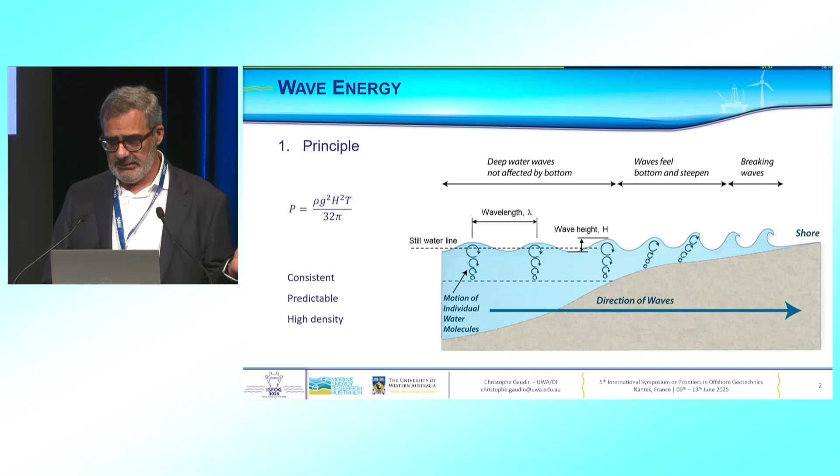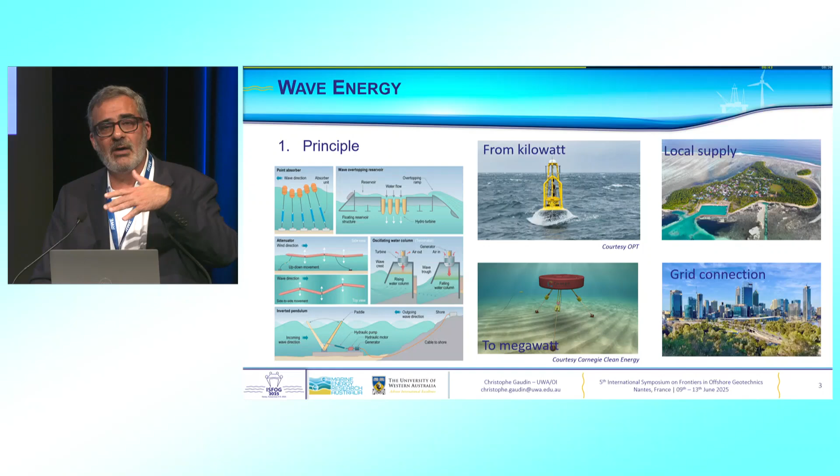And so the second advantage of wave energy, as opposed to wind energy, is that you won't see a convergence of the technology like you've seen for wind, converging towards the three-blade systems that we are all familiar with. There is a huge variety of wave energy systems that range from the kilowatt to the megawatt, and can cater to various markets, all the way from grid connection to power homes, to regional communities and islands displacing diesel, and also ocean sensors, and so on. And that's another advantage of wave energy that we will be exploring.

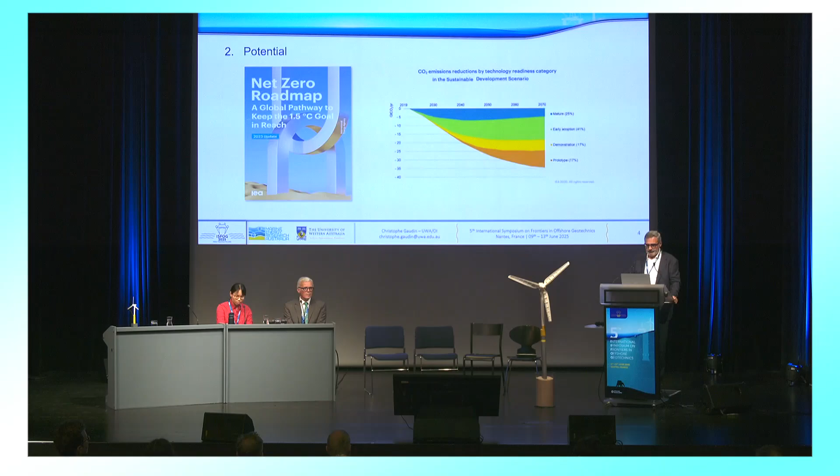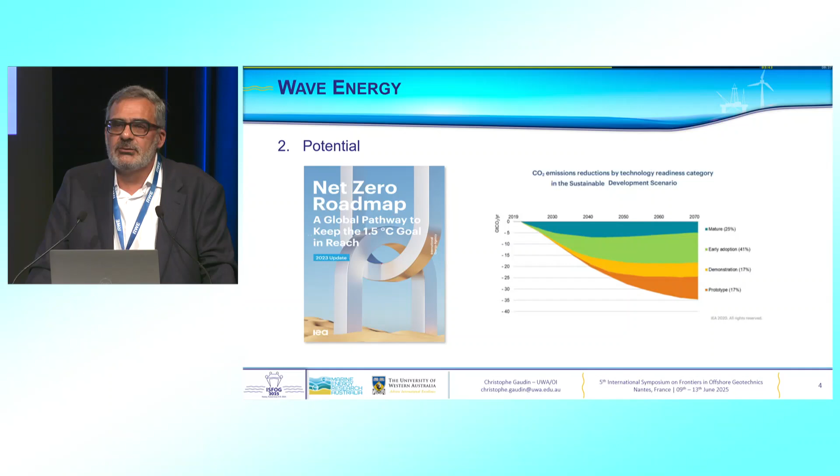As Luc mentioned, I'm part of the International Energy Agency. If you are not familiar with the body, the International Energy Agency does a lot of prospective analysis. One of their key reports is the net zero roadmap to achieve net zero by 2050. And an important message out of that report is that 75% of the technology needed to reach net zero by 2050 doesn't exist yet. What does it mean? It means that we are not going to achieve it with wind and solar and nuclear power alone. We'll have to develop new forms of technology, and wave has a role to play in the future energy mix.

Within that body, there is a lot of work being done, and so one of the subsequent prospective analyses that has been undertaken by Professor Henry Jeffrey from the University of Edinburgh is to try to understand the market demands and the economic benefits of wave energy being developed. And so you've got some numbers here. We talk here about all ocean energy, so it's wave and tidal.

And so by 2050, it is predicted that we will have about 300 gigawatts of installed capacity, creating 680,000 jobs, adding $340 billion in gross value to the world economy, and capturing 500 million tons of CO2 every year. So 500 million is 0.5 gigaton out of the 37.2 that we are emitting every year. So that doesn't seem a lot, but still, it's 50 times more than CCS will ever capture, and for an investment which is at least one order of magnitude.

Did you spot the provocative statement here? I hope that's going to fuel some interesting conversation at the tea break here.

So where are we in terms of technology? So technology has been evolving, following somehow a quite challenging pathway. Developers have been working very much in silo, protecting technology with IP and so on, then going under administration, all the lessons learned were lost, and so on. And so unfortunately, the technology has not evolved as rapidly as what we've seen in wind and in tidal, but has reached now levels that are close to commercial development.

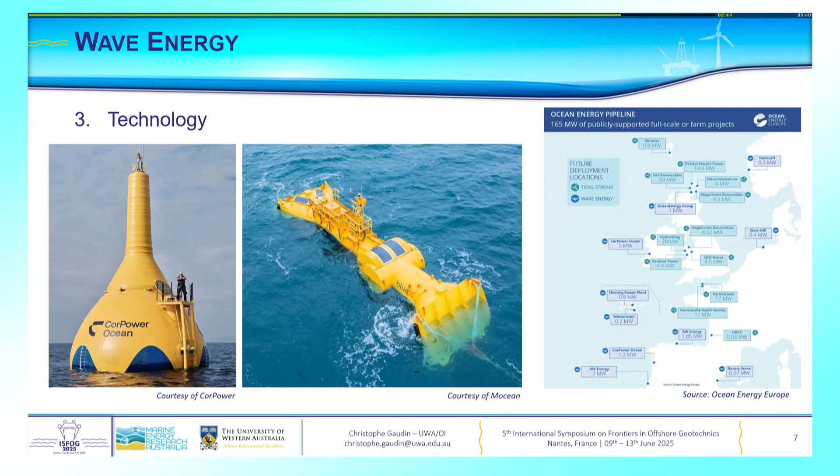Nevertheless, there is actually a pathway for development and deployment over the next decade, with about 160 megawatts of ocean energy being deployed in Europe over the next decade, and about 25 of them is going to be wave energy, with, again, CorPower developing the first farm of wave energy converters in Ireland for a 5 megawatt capacity.

So let's bring that to the Australian context now. In collaboration with the Blue Economy CRC, Cooperative Research Centre, which is a 10-year industry research collaboration in Australia that has a strong focus on aquaculture and ocean energy, the team at the Oceans Institute at UWA has developed an Ocean Wave Energy in Australia report that presents the potential of wave energy in Australia, the technological pathway, and the hurdles that need to be overcome to achieve its full potential, and provides recommendations for state and federal governments.

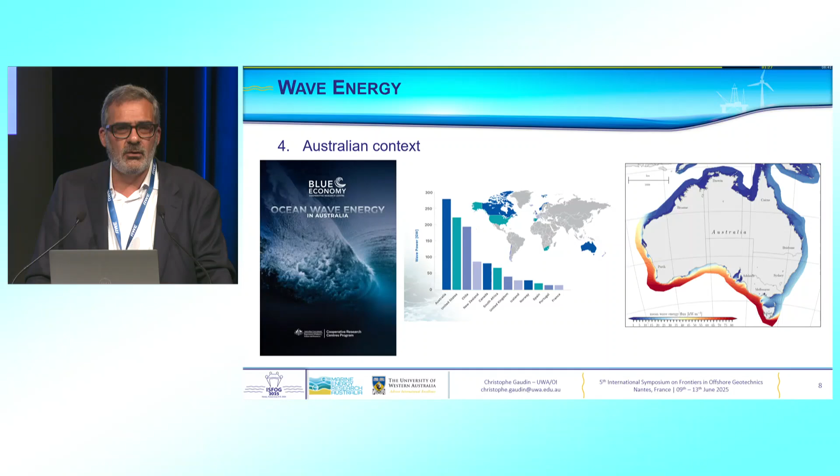In Australia, we're extremely blessed because we've got the best wave energy resources in the world by a long shot. You can see here that the potential capacity is over 270 gigawatts. It far exceeds what is needed to cover the domestic consumption. And a second advantage is that most of these resources are located on the southern coast, where we've got the highest density of population. In Albany, that we'll talk about a bit later, we have the best wave energy resources in the world, about 50 kilowatts per meter of wave all year long, very consistent with very small variability.

But that's not the whole story. The potential of wave energy is not only the resources, the energy density, and so on. Most importantly, it is the complementarity to the other renewable energy resources. And so our team has been doing a bit of work, started locally, looking at Australian cities along the coast of WA and expanding to the whole Australian context, to understand the impact of bringing wave energy into the energy mix in complement to solar and wind.

Once you start adding wave energy into the mix, the complementarity of the energy profile between the 3 resources actually leads to meeting the demand on a monthly, a daily, and a seasonal basis, and in most cases without any need for permanent storage.

To achieve that, you need obviously to vary the proportion and the distribution of how much wind, how much solar, and how much wave we've got. But I think it's a very compelling case about where wave energy can actually complement our renewable energy profile.

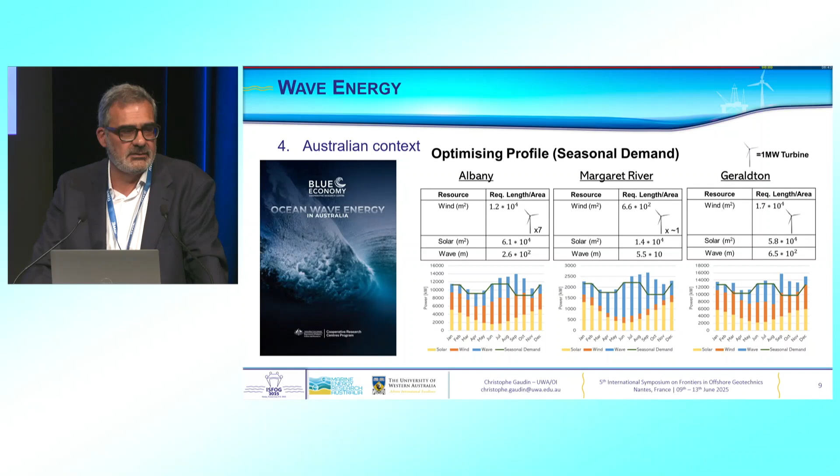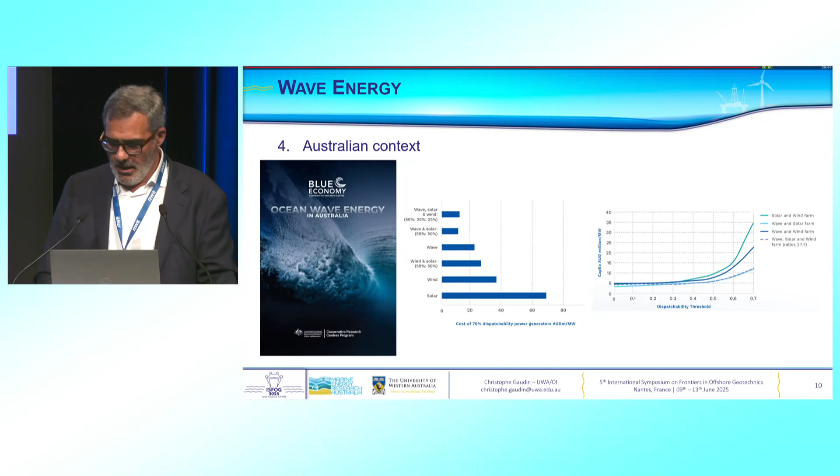So where does it leave us? That brings us to what we call the Albany M4 project, a project which I've been very privileged and fortunate to lead, assisted by Dr. Hugh Wolgamot and Dr. Wiebke Billing, who is the Center Manager of Marine Energy Research Australia in Albany. And so we had this crazy idea about 4 years ago to actually design, manufacture, deploy, operate, and decommission a wave energy demonstrator. We've done that in Albany, which, as I mentioned, has the best resources in the world.

It's about 500 kilometers south of Perth on the Great Southern Coast, a beautiful spot, and that has the advantage of having both a very, very high energy site, where you can actually deploy a full-scale wave energy converter to produce energy at the megawatt scale, but also a nursery site, which is simply a kilowatt scale, but which is very good for demonstrator purposes.

So we've decided to deploy what we call the M4 wave energy converter. This is a design that has been developed by Professor Peter Stansby at the University of Manchester. It's what we call a hinged attenuator line absorber. It's a very simple device. It's a one wavelength device, and as you can imagine, there is a rotation in the middle, and so when the floats at the front and at the back are on the crest of the wave, the middle is in the trough, and vice versa. And that rotation at the hinge can be captured to transform, again, kinetic energy into electricity.

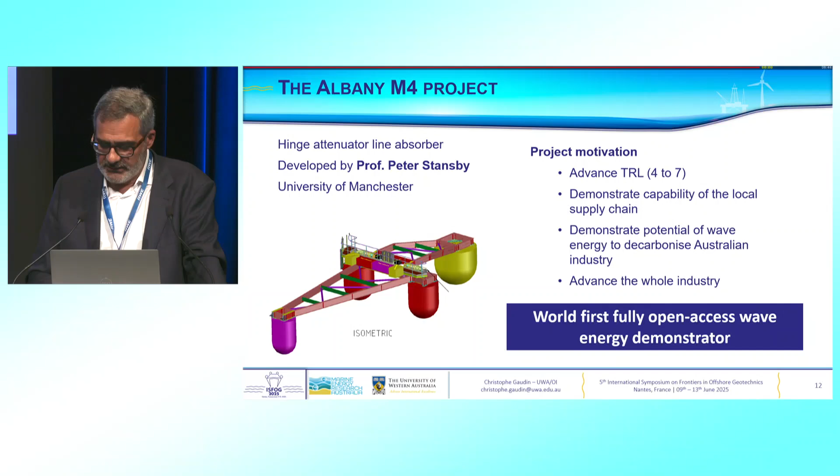I mentioned earlier that progress has been slowed down and made challenging by the silo mentality between the developers. And so with M4, which is IP-free, we're actually doing the world's first fully open access wave energy demonstrator, where all data, including power capture and power efficiency, will be made public and available to everybody, with the hope that we can advance the whole industry with this.

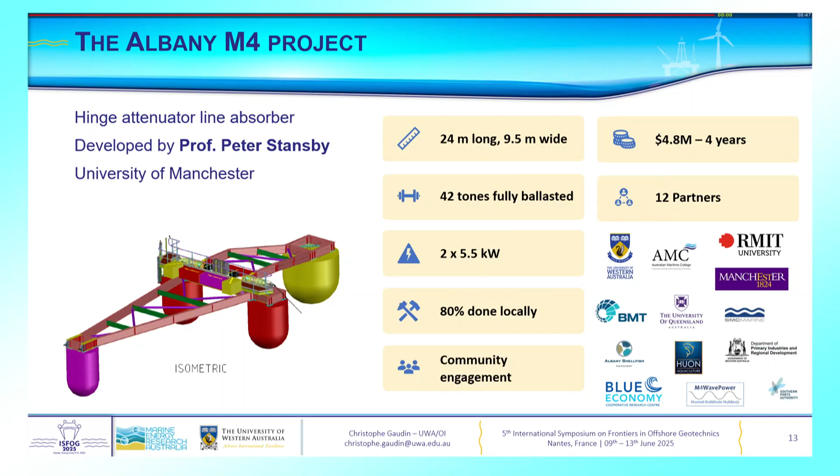Some metrics here very rapidly. It's 24 meters long, 42 tons fully ballasted, two times 5.5 kilowatt generators, so 11 kilowatt capacity in total. Done 80% locally, quite an important point because it was funded partly by the state government. And with a strong community engagement to work on the social license of ocean energy, which can be a challenge. It is definitely one in Australia, having worked with the federal government on the public consultation and social license for offshore wind development in Bunbury. It has proven to be extremely challenging.

It's a nearly $5 million cash project with another probably $5 million of in-kind and many sleepless nights. So $10 million and 12 partners, with UWA being the lead, but working with multiple institutions across Australia and in the UK, notably the University of Manchester.

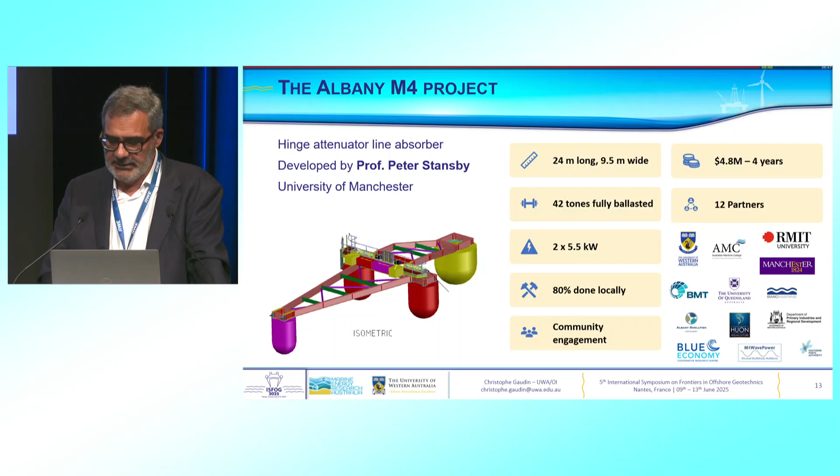So why M4? So first, as I mentioned, it's IP-free, so we can publish everything about it. And actually, if someone is excited by the technology, you can come up and take it over and develop it to the next level. You're more than welcome. It's been optimized heavily through lab testing for low levelized cost of energy. It has also been optimized for survivability, maintainability, deployability, simplicity, and it's scalable from kilowatt to megawatt.

And I'm going to use that example to kind of debunk some of the prejudices that people may have about wave energy. You know, it's too complicated, the ocean is too harsh an environment, this is never going to work, and so on. So let's look at optimized LCOE.

So you've got here the device in a front view. And what you see in the blue is actually the gearbox here. So remember the device is floating, is flexing, and so we've got the 711:1 gearbox ratio. That in turn powers a generator.

From that generator, you get electricity that you put in an AC-DC converter that eventually goes to a supercapacitor to smooth the profile, because obviously it's an intermittent energy input, and then eventually that winds up in a resistor. We didn't have the budget to put a cable to shore and connect that to the grid. That will be the next step.

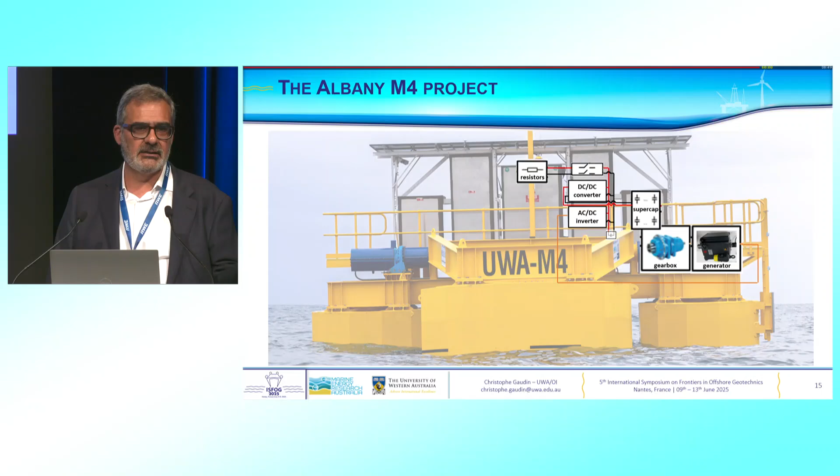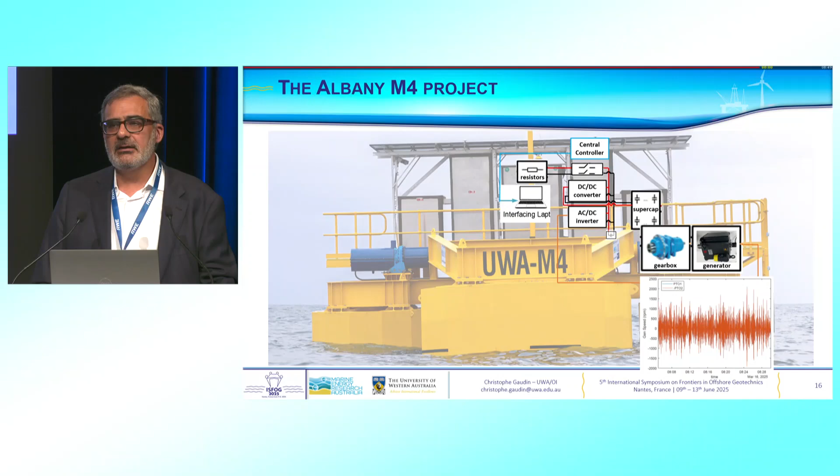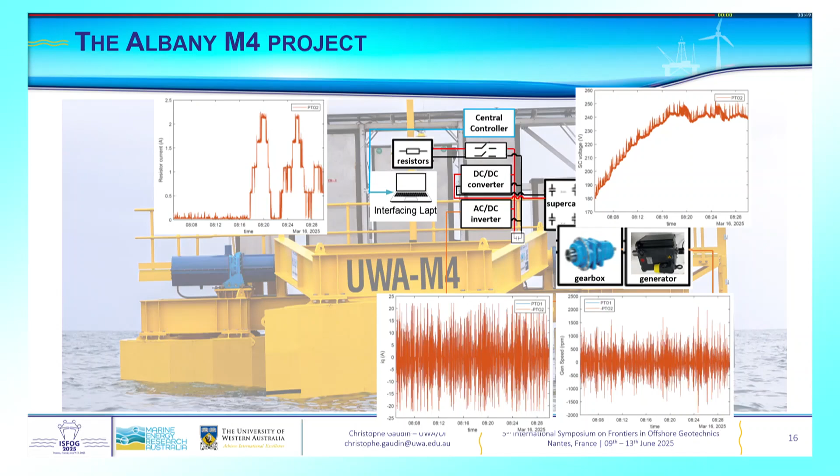And all of that is controlled locally by a computer, and notably that enables fine control of the power takeoff to optimize power capture. So we've got an input from the generator. The electricity generated is directly proportional to the torque in the gearbox, as I mentioned. Then we dump that into the supercapacitor to smooth the energy profile. When it reaches a cap, it's dumped into the resistor.

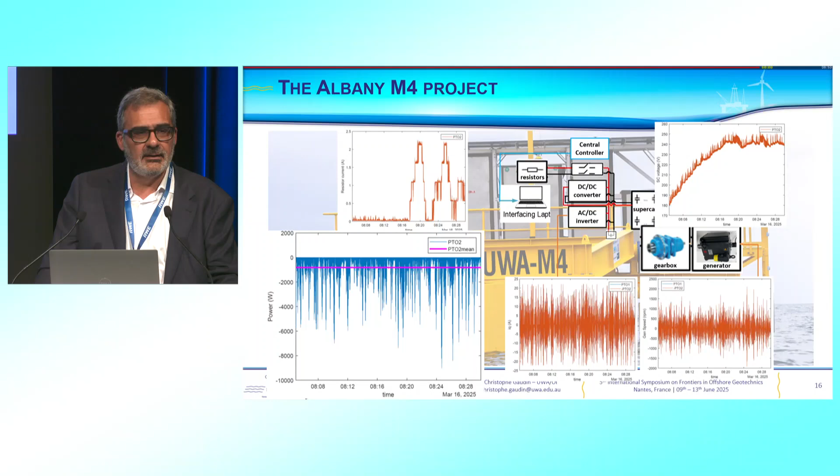And eventually this is the resulting power profile that we've got. The power profile here is for the moderate sea state with a significant wave height of about 0.8 meters. At that significant wave height, we ended up generating a peak power of about 9 kilowatts and an average of slightly below 1 kilowatt, which is actually very promising, and I'll explain why later.

Another aspect of it is survivability, and lucky were we that on day 10 of the deployment, we experienced the highest significant wave height at the site, about 2 meters, so maximum wave height of about 4 meters, and a hinge angle of about 40 degrees. And the device survived that extremely well without any technical issue at all, and has been experiencing rough weather like that over the 6 months of deployment.

Another advantage of it is the maintainability. We've got all the power takeoff and all the electronics, as you see, 2 meters above seawater. The photo you see on the right is the splash under this 40-degree hinge rotation, and that just barely touches the base of the passageway and all the electronics. And it's a very important aspect.

Just to put some context, on the 13th of March, we had the highest rainfall in Albany ever recorded, and the record started in 1887. For those who are familiar with Australia, this is Middleton Beach completely flooded. And that resulted in a failure of the data module.

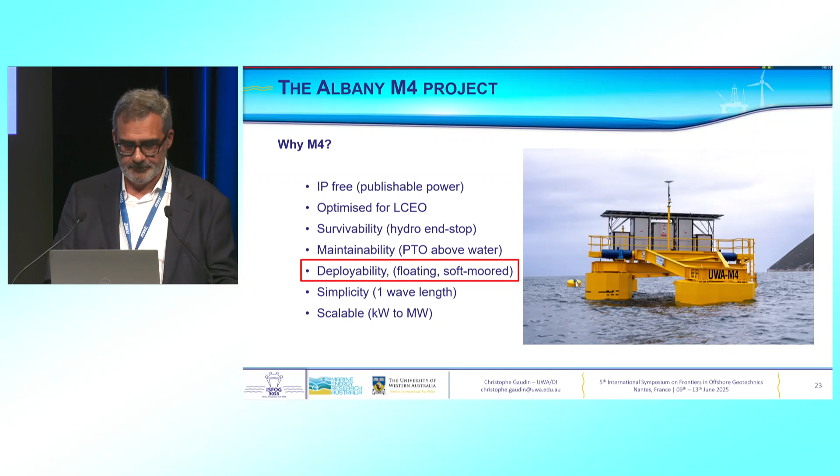But no drama, because we could simply jump on the Zodiac, go to the device, get up on the passageway, open the cabinet, and that was just a small leak of water dripping from a single bolt that was not totally sealed, dripping onto the data module, and we just had to switch it back on and be back in operation immediately. Another advantage compared to other devices, for example, that may have the PTO submerged underwater, which makes maintenance very difficult.

Deployability is also a very important aspect. I couldn't talk about it without mentioning the anchoring system. Very simple anchoring system: a 10-ton floating buoy connected with a single riser to 2 clump weights of 2.5 tons, and then to 3 1.5-ton anchors, 20-ton mooring capacity, and you see here some of the photos of the device deployed.

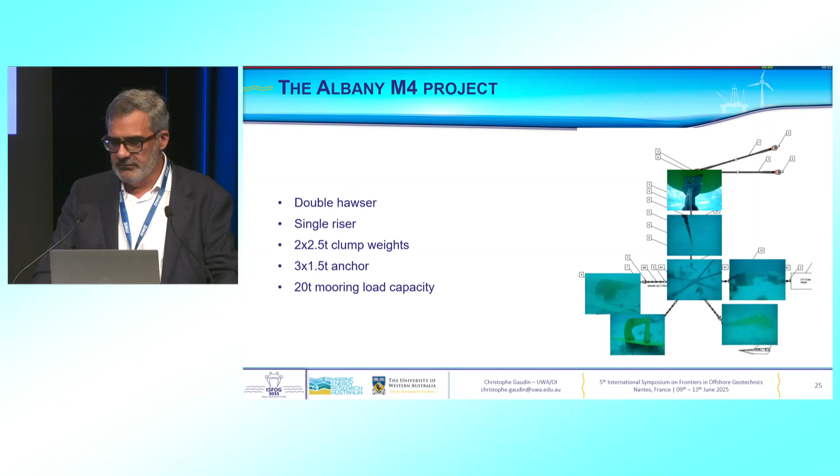If there is one thing that we learned from that project, which I'll explain a bit later, it's the need to revisit the regulations and codes, because this is highly over-designed. It's a 20-ton mooring load, and the highest load that we have ever measured, even in the condition that we just saw in the video, has been only 3 tons.

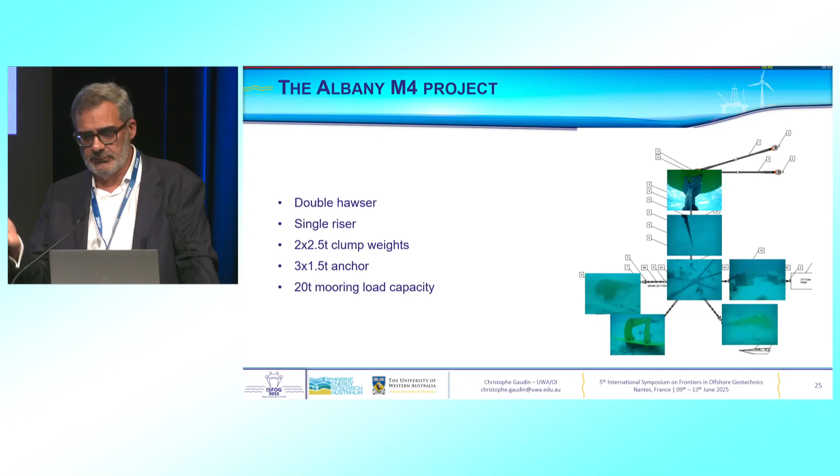Deployability: this is an accelerated video of a small boat coming to tow the device back to shore for a bit of maintenance. Within 30 minutes, you can unhook the device from the mooring buoys and bring it back to the marina. It is as simple as that.

We've been measuring a lot of data out of this device: hydrodynamic performance, power generation, power distribution, marine growth, mooring response, and marine noise. The device was taken out of water on the 30th of April, so it's very new. We are simply starting now to look at the data.

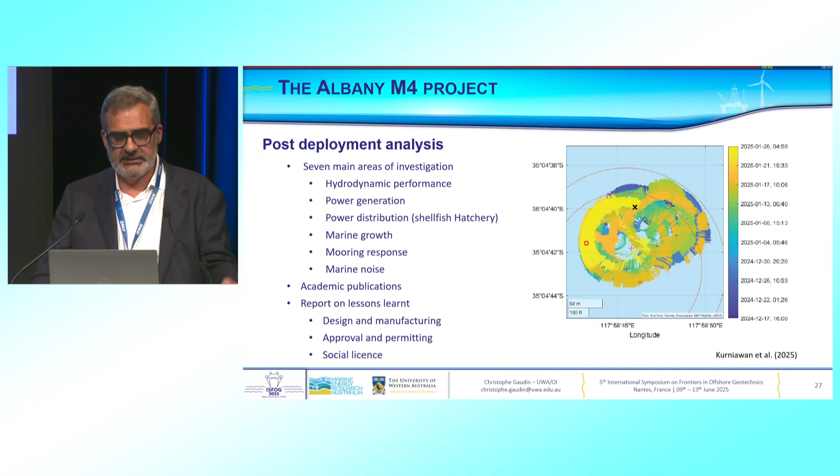And one thing we learned, which I thought was very interesting, is that everything worked as predicted. That may seem quite underwhelming, but it's actually quite an important result. It validates the approach that the M4 device has been following, which has been focusing on the technological performance level rather than the technological readiness level, which is the pathway that most of the previous developers have followed.

And the problem with the TRL path is that you need to engage very high capital immediately to put a device in the water and test it again and again and again. Whereas when you follow the TPL curve, you actually do a lot of lab testing beforehand and go to the water only when you have gained enough confidence and understanding about how your device is working. And I think M4 is a very good example of that.

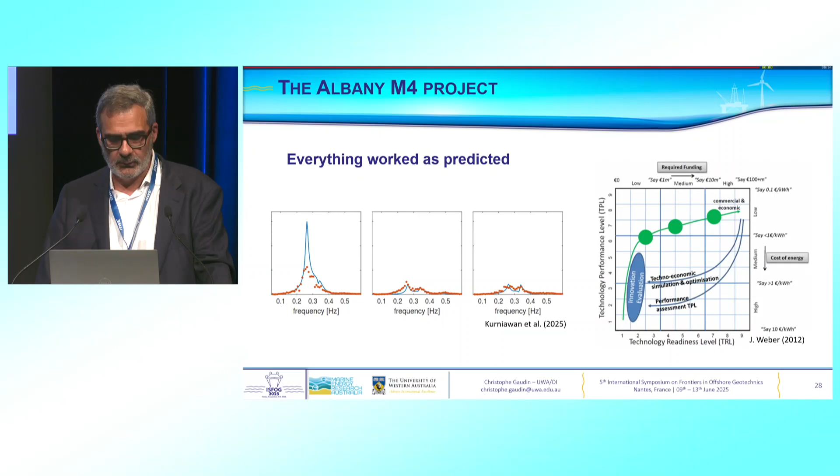What you see here is the RAO for the hinge rotation and the comparison between prediction and what we measured. So what we learned, very briefly now: there is a lot of room to optimize the design, and again, this is a call to revisit the regulations.

BMT was our partner in that, did everything by the code using DNV regulations, and so there is room to optimize everywhere. And so I think if we want to reduce the levelized cost of energy, this is necessary: regulations that cater for the very specific characteristics of wave energy converters as opposed to general offshore engineering design.

Another thing which has been very satisfying is the local capability. Albany is a small town, it's 30,000 people, and yet we found everything locally. It was manufactured locally, deployed locally, and so on. And so we've limited upskilling, but it actually benefited extremely well the local community and the local business. It is a higher cost, but it has proven to be the right choice.

The PTO is actually the only thing that was produced externally, and we ended up having so many issues with them that the extra cost associated with that was very significant. So I think local is always a good advantage. Very strong support from the local community. We engaged very early in social licensing, and that has proven to be very important.

As I mentioned, 12 partners, the importance of partnership, and having a very good risk management plan, because obviously nothing went smoothly, as you can imagine, even if the story sounds nice at the end. Next step, and that was the whole purpose of that project, is to raise the potential, raise the awareness of wave energy in Australia, and bring the community and the industry along.

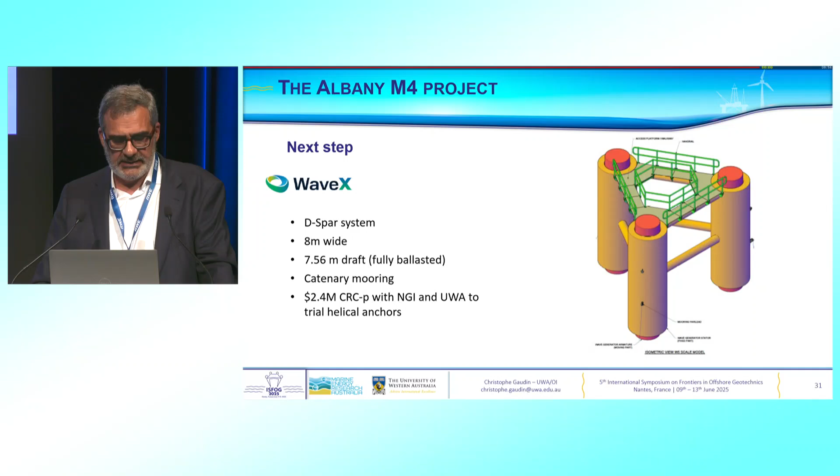And so that's going to be the opportunity for me to talk a bit about geotechnics, although Luc has forbidden me to do so. Within that project, we are going to explore the potential of helical anchors from a local company. Local aquaculture uses helical anchors extensively for mussel nets that are 140 meters long, and so they have developed the technology and the capability to use helical anchors.

And if you looked at the proceedings of the conference, you'll see that we've got a fairly large helical anchor research program that is championed by Giuliano, who is going to present a bit later this afternoon. And so Giuliano will be championing, in collaboration with Pierre at NGI, the development of helical anchors for this project.

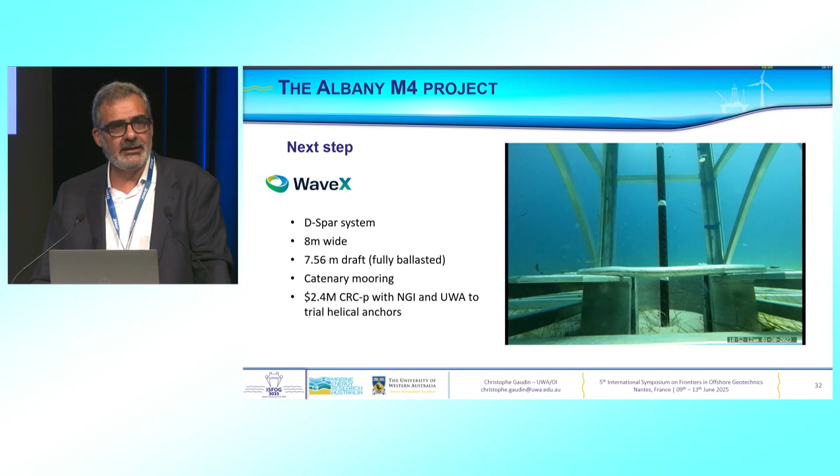And that's all for me. I hope you've been convinced about the potential of wave energy.